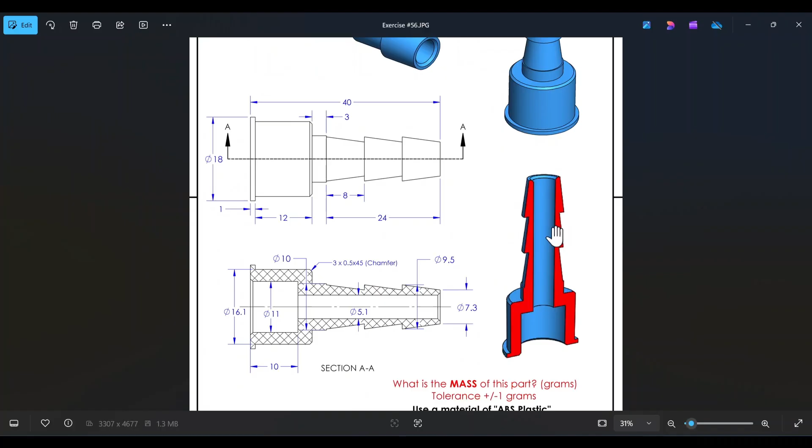Here we see the schematic drawing for exercise number 56. All dimensions are millimeters. We have two isometric views and we have a section view. And the section view showcases the internal details of the component. We have the front view and we have another section view showcasing the internal dimensions, all right? And this section view was taken along this cutting plane, section AA.

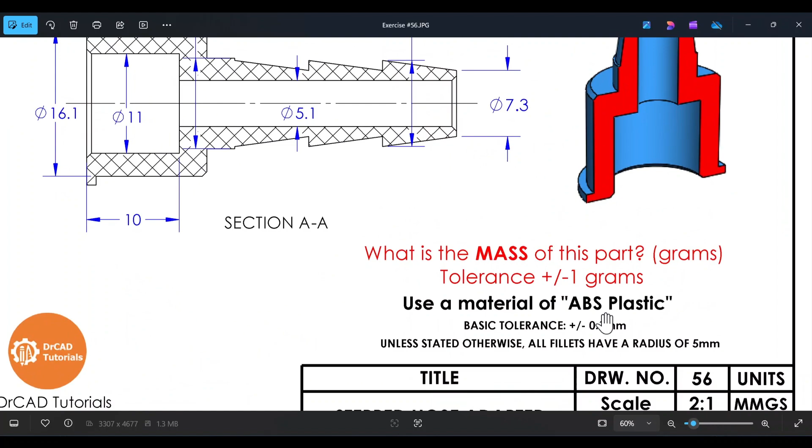All right, so in creating this part, of course, we need to answer the question, what is the mass of this part in grams? And we're following the millimeters, grams, and seconds unit system, all right? So that is the unit system that we're going to follow. As for the material, we're going to be assigning material of ABS plastic. So this part here, this hose adapter, will be plastic.

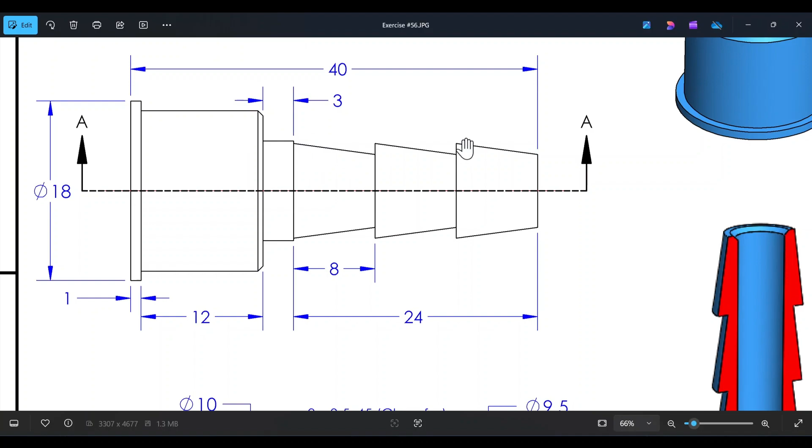All right, so how are we going to model this within SolidWorks? And I think the easiest way to create this would be to sketch out half the contour of the front plane that we see here, all right, using the line tool. And then we're going to assign all the necessary dimensions. You can find the dimensions either on this front view or this section view, but for the most part, most dimensions are going to be found in the front view. And then after that, we're going to use the revolve boss base tool to create the main 3D body.

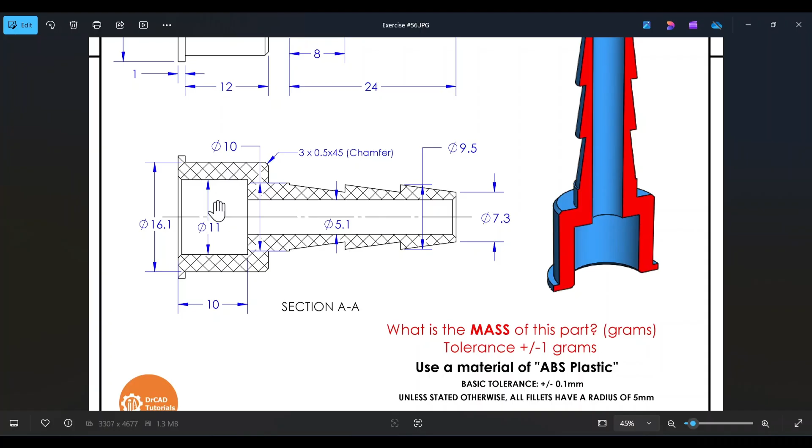Subsequently, we're going to use the extrude cut tool to create the opening here. If we look closely, we have a stepped opening. The first opening has a diameter of 11 millimeters, followed by a cut depth of 10. And then we have another opening with a diameter of 5.1, and then the opening goes all the way through the component. Please take note here that we have a chamfer. We have three chamfers. We have the chamfer right here. That's 1, 2, and 3.

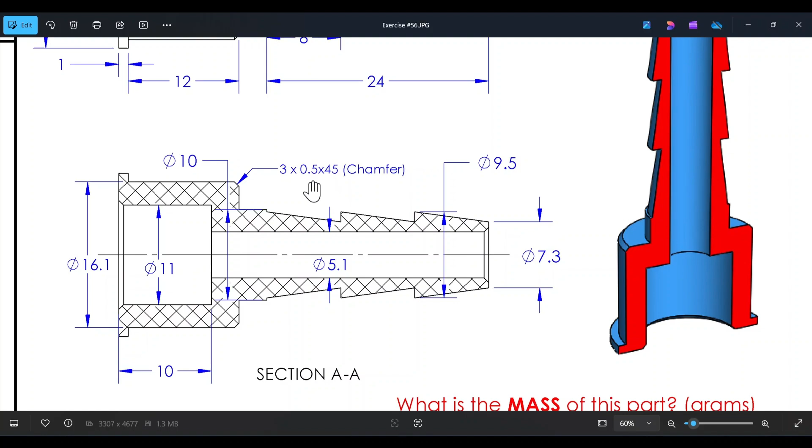And we see here that the dimension for the chamfer is 0.5 by 45 degrees. That is the distance and angle convention. But also we could use the distance convention since it's 45 degrees. So either way, either the vertical dimension or the horizontal dimension is going to be 0.5. And of course, the chamfer is going to be added at the very end.

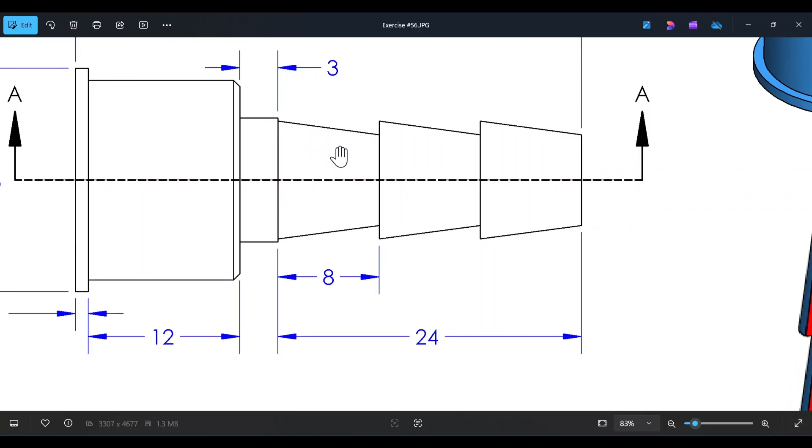So in creating the 2D sketch, we're going to ignore any chamfers that we have, all right? And then just use the revolve boss base tool and then add any necessary details at the very end using the 3D features. So that is our game plan, and it's a very simple part within SolidWorks. So with that aside, let's get started with exercise number 56.

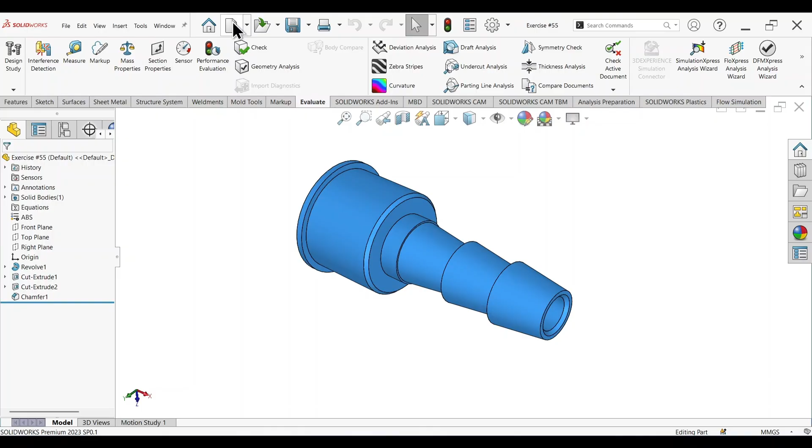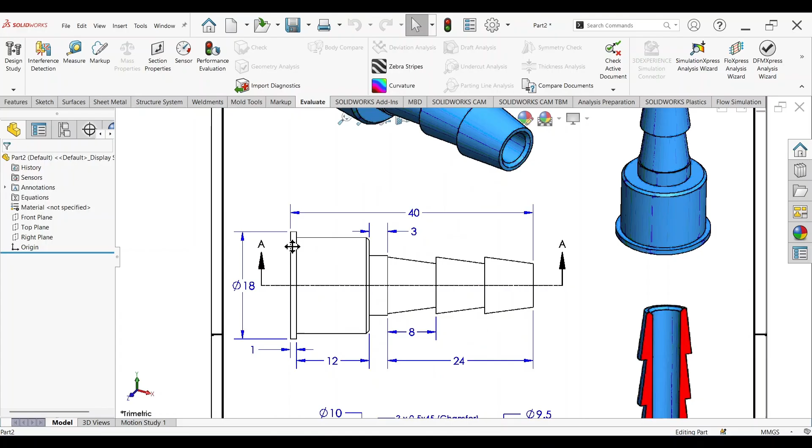Okay, so to start, let's go ahead and create a new SolidWorks part. Let's set the background to plain white, and let's go ahead and copy exercise number 56 into SolidWorks. All right, so let's just make this smaller. Again, this is a very, very small component of about 4 centimeters across from one end to the next. So it's expected that the final weight for the component is going to be in the grams, so it's very, very light.

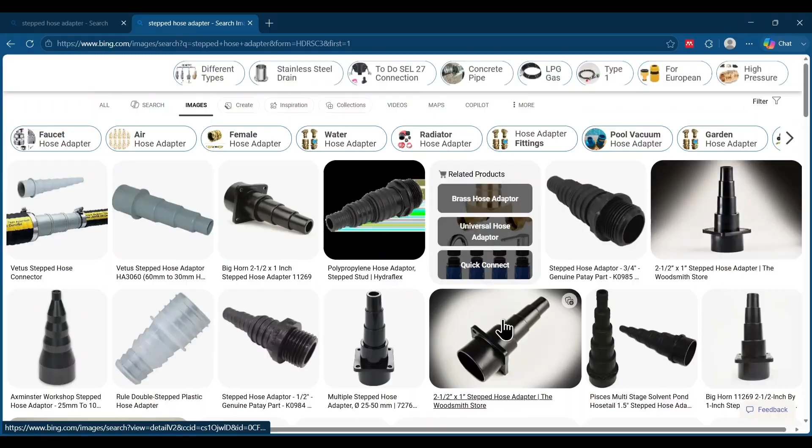So before we actually model this component, let me just show you something here. I took it upon myself to show you what certain hose connectors look like, hose adapters. So if we do a simple Bing search, we see that we have many different variations of hose adapters. But for the sake of our tutorial, we have a stepped hose adapter. So in this case, it looks something like this. Okay, so we have these grooves that prevent the hose that we're connecting to from sliding from the adapter itself. So again, this schematic drawing was taken from an actual component that I have lying around at home. Sorry for the slight detour, but it was something that I thought I might share with you.

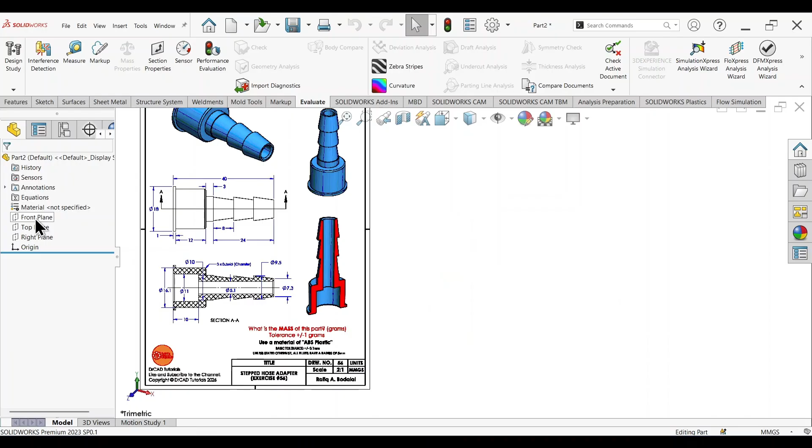Anyway, to remind you, the easiest way to create this would be to sketch out the 2D profile and then use the revolve boss base tool. Okay, so to start, let's select the front plane, sketch. Let's drag this upwards, and what I'm going to do is very simply, again, sketch the contour that we see here using the line tool. And as for our origin, it's going to be right here. All right, so just drag this closer.

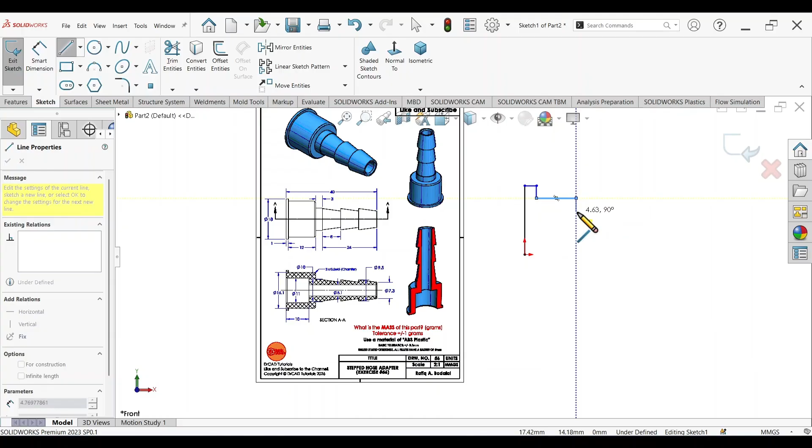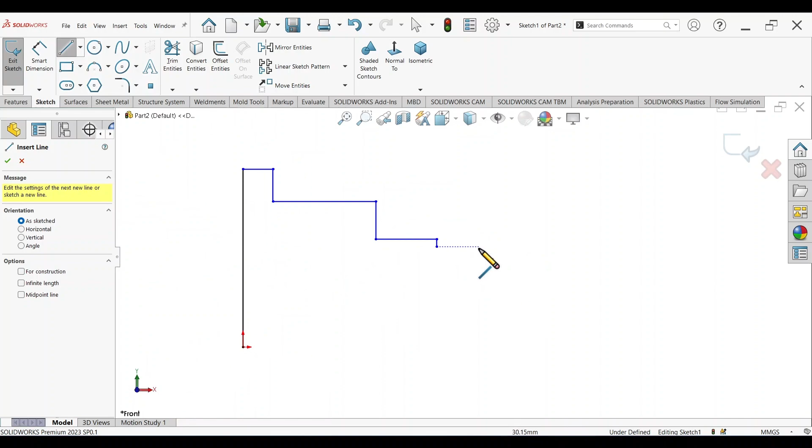Activate the line tool, and from this point, let's go ahead and draw the contour. That's 1, 2, 3, 4, all the way to the bottom here. Then we have another horizontal line, another one just slightly vertically downwards. All right, and then what do we have? We have a line here that goes, let me just make sure, okay, yeah, that goes like this. And then, again, this is just me creating the contour here.

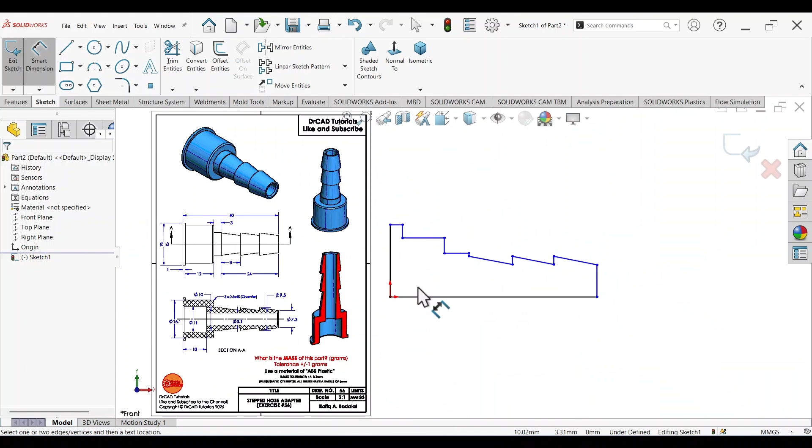Oh, and then close off the figure. All right, so that is the best approximation that I can create for the 2D profile. So then we're just going to apply the dimensions. And we begin by the largest dimension that we have for the component, and that is 40 millimeters from one end to the next. So the distance from this end to this end is 40 millimeters.

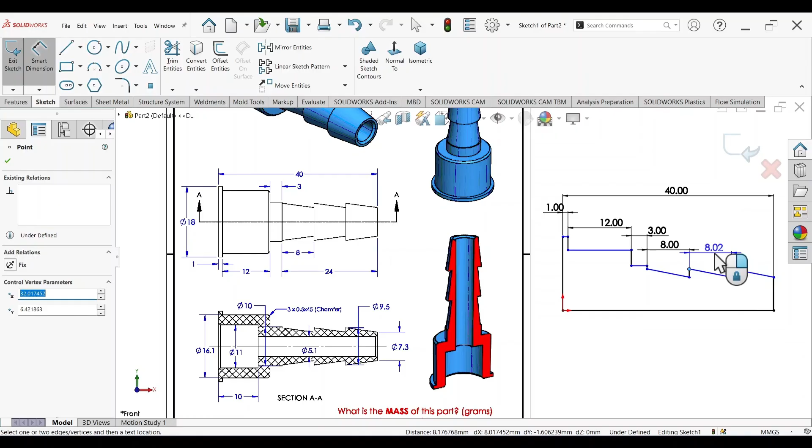Okay, so the dimension here for this line is 1 millimeter. Just follow the dimensions that we have here, guys. We have this as 12. This right here should be 3 millimeters. From this end to this point, it should be 8, and it should be 8 likewise from here. So this is also 8, and this is also 8, since it's just a repeating pattern.

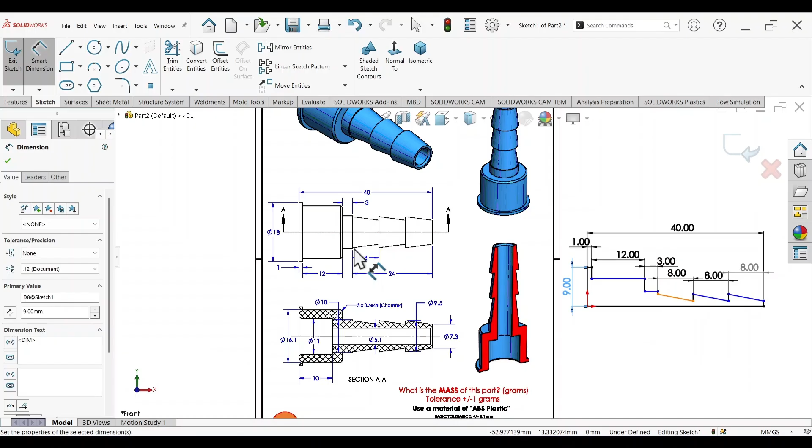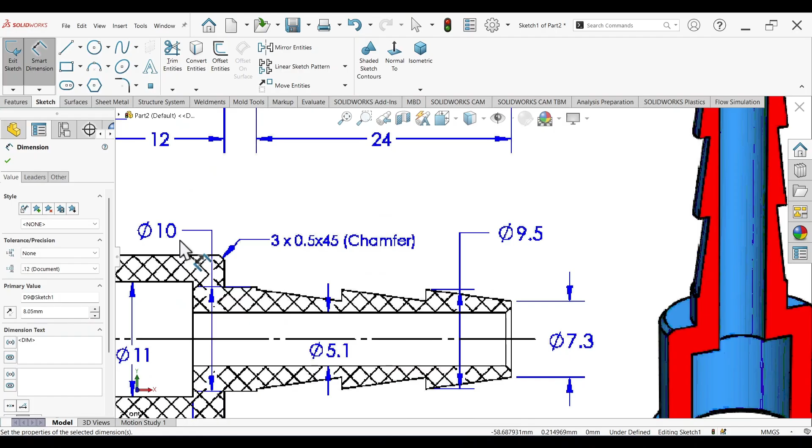Okay, so what else do we have? We have a diameter here, largest diameter of 18. So this should be 18 divided by 2, which gives us 9. And what else do we have? Look at the section view here. We have from this edge to this edge is 16.1. So this is 16.1 divided by 2. And from this edge to this edge is 5.

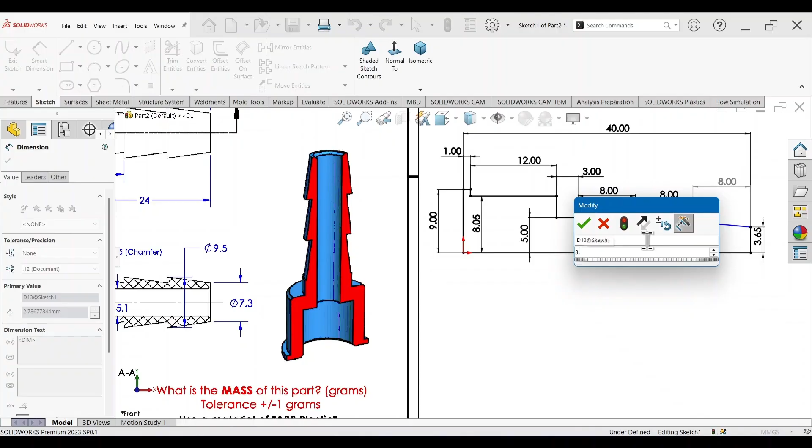We're not going to stop until the sketch here is fully defined. That's when we know that we have all the dimensions needed for the revolve process. So for this edge right here, it's 7.3. So this is 7.3 divided by 2. And likewise, this is also 7.3 divided by 2, which is 3.65. Same thing here. From this point to this point, 3.65.

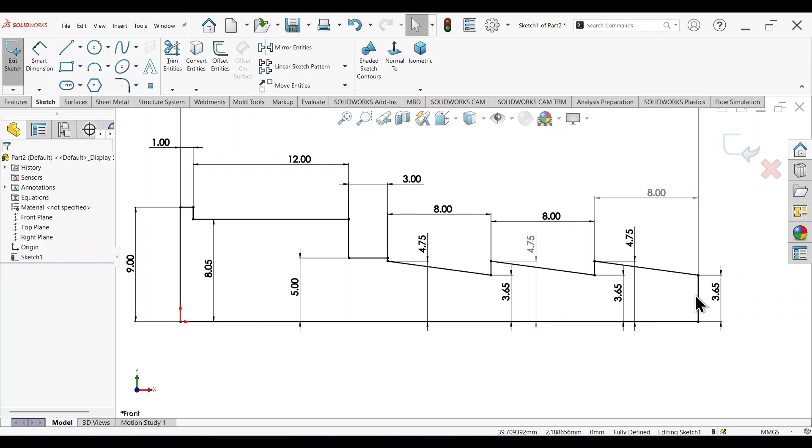So what else do we have? We have from one extreme to the next, where the stepped section is 9.5. So from this point all the way to the center line, it's 9.5 divided by 2, which is 4.75. And just repeat the process right here. So this is 4.75. And same thing here, 4.75. Now, if we look closely, all the entities and lines are in black, and we have a comment at the bottom that says fully defined. So the sketch is now fully defined.

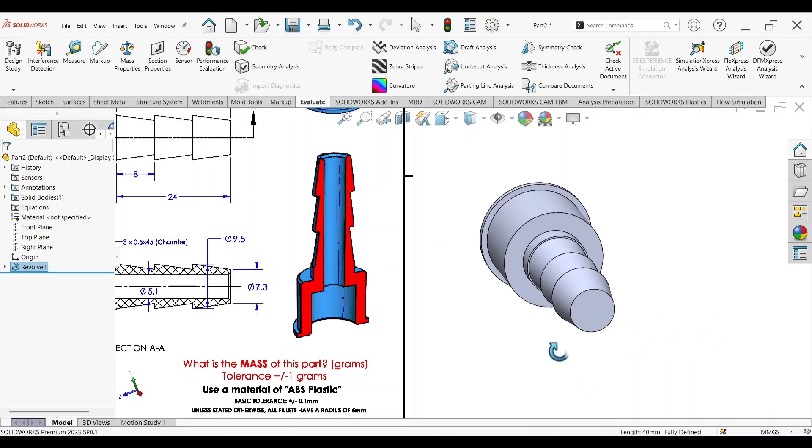Now we just press the S key, revolve boss base. For the axis of revolution, select this line here, and then click OK. And that creates the main body for the component. See how easy it was using the revolve boss base tool. Now, if we look at the section view, we have a stepped opening. We can either sketch out the 2D profile of half of it and then use the revolve cut tool, or follow the more intuitive approach: sketch out the circle and use the extrude cut tool twice. So I'm going to use the second method.

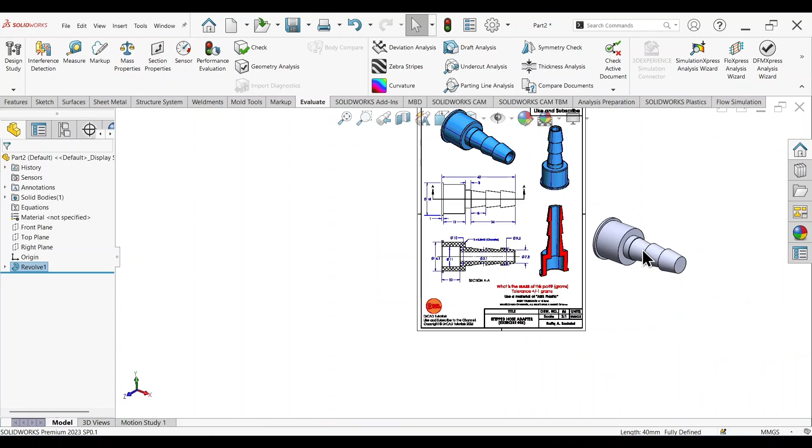Just click on this surface, sketch, activate the circle tool, and from this point, draw a circle, smart dimension, and the diameter of this circle should be 11 millimeters. Press the S key, extrude cut. The cut depth should be 10 millimeters. The end condition now is set to through all both directions. So just right-click on your mouse, select blind, and by default, the extrusion depth is 10 millimeters. Then click OK.

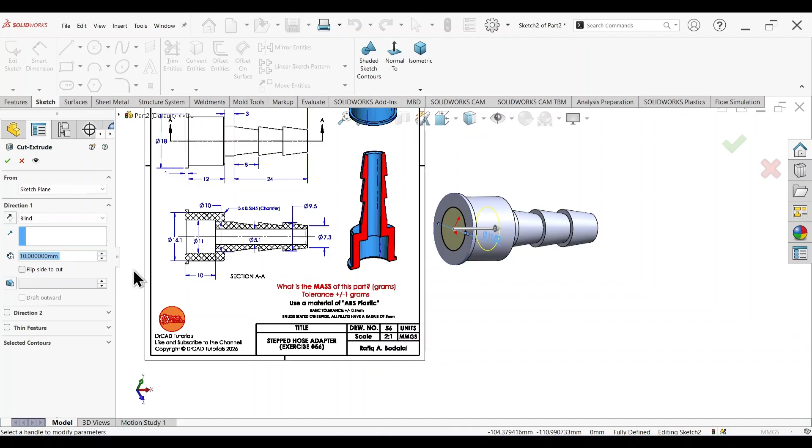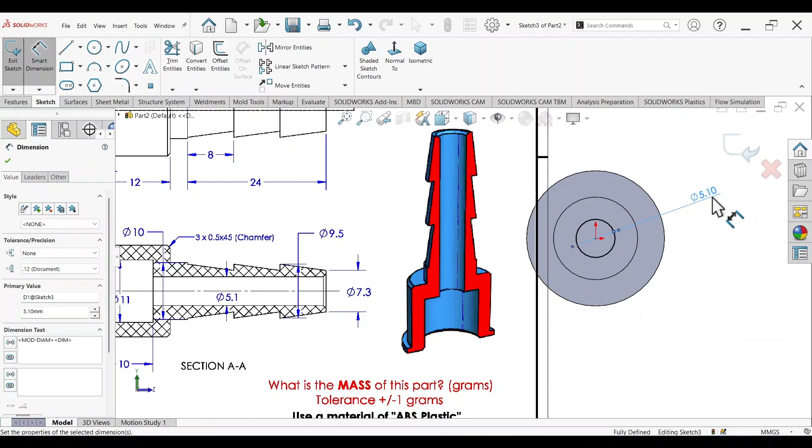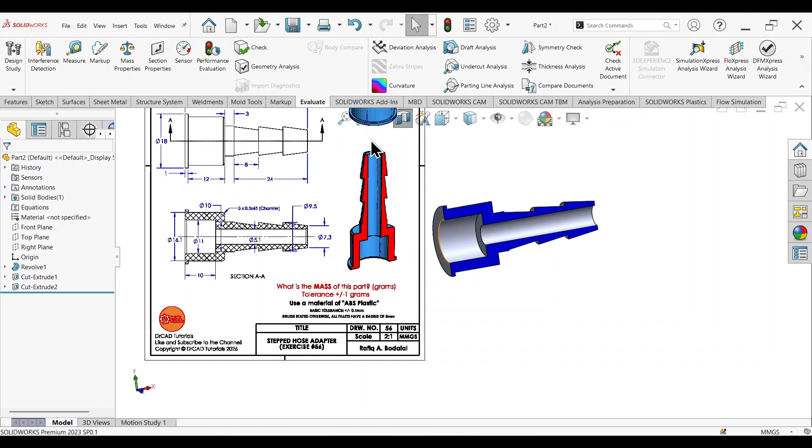Now click on this surface, sketch, activate the circle tool, and from this point, draw a circle, smart dimension, and we have a hole here of diameter 5.1 millimeters. So this is 5.1, press the S key, right-click, through all both directions, and then OK. So that creates the opening for the component. If we take the section view, we can clearly see that the component corresponds to the section view in the schematic drawing. So let's deactivate that.

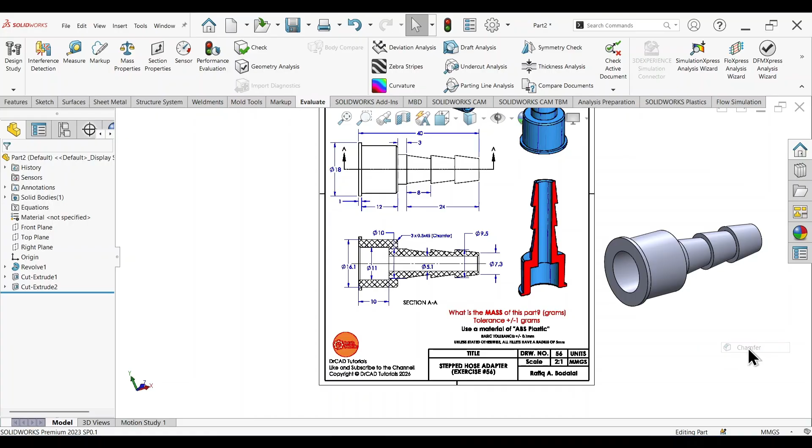Now, one last thing to do is add chamfers. We have 3 chamfers: 1, 2, and 3, and each has a dimension of 0.5 by 45 degrees. So press the S key, chamfer, enter a dimension of 0.5 millimeters, and assign the chamfered edges: 1, 2, and 3. Then click OK. So that concludes the modeling process.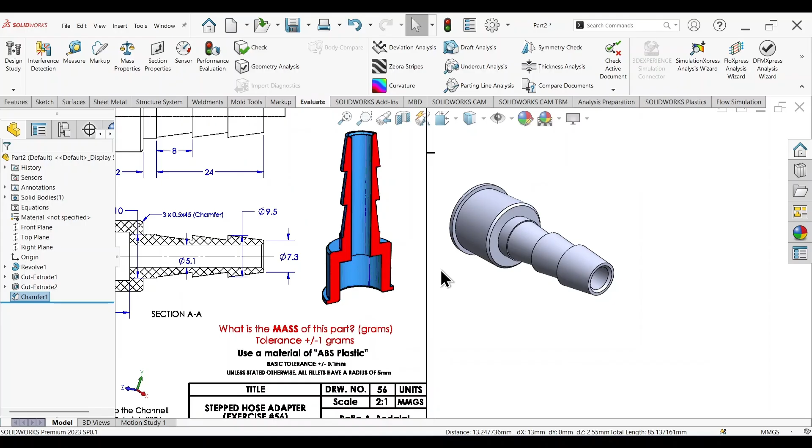So go ahead and delete this image. Assign a material: right-click, edit material. Go down to the bottom, select plastics, then select ABS plastic, apply, close. We can assign a color. It's up to you. I'm just going to select the first color that I see here.

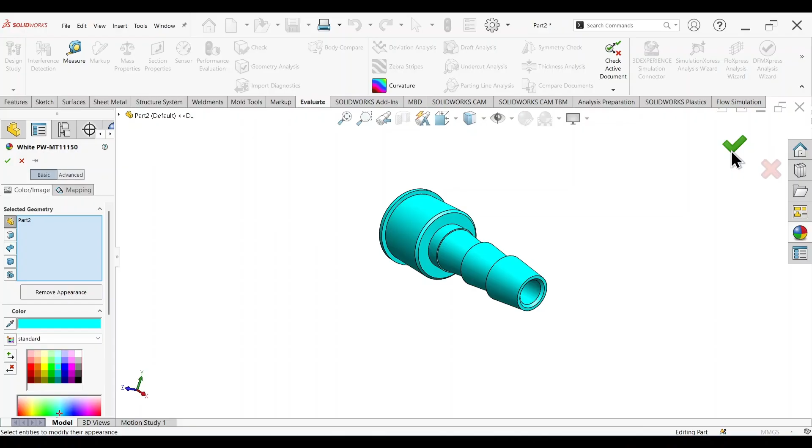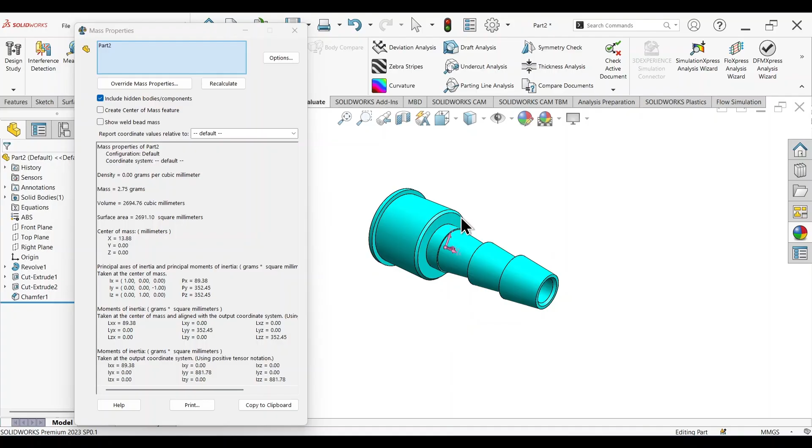Now for the moment of truth: go to the Evaluate tab, Mass Properties, and we have a final answer of 2.75 grams. That is the mass for the component. This component is very small, about 4 centimeters from one end to the next. It's a hose adapter, it's going to be light, and it's made of ABS plastic. So the answer here is very reasonable. That concludes exercise number 56.